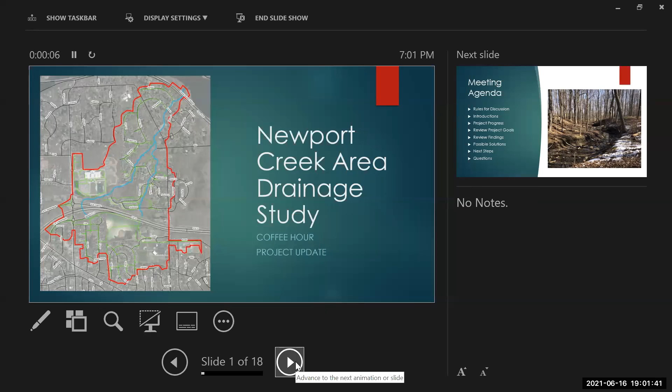I'll let Jamie start the slideshow while I say thank you to those of you who took time out of your evening to join us for a project update for our Newport Creek area drainage study.

Jamie, we're seeing your entire behind the scenes presentation. Oh, are you? Hold on a second. We are. Might want to change to the other slide or share the other screen.

But again, this is kind of the middle of the road, almost near the end of the road. What we anticipate from this meeting is kind of covering everything that we found out in the field, as well as some preliminary recommendations. But again, this is not the final report. This is not the final meeting. This is just kind of the next steps to give the community an update as to where we are on this project, and make sure that if there are any questions that we can answer along the way.

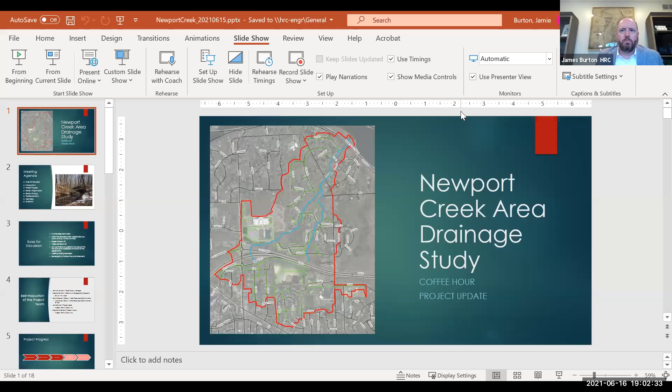And I will let Jamie try it again. Hold on. Technology always. How about that? That is perfect, Jamie. Thank you. Okay. Wonderful.

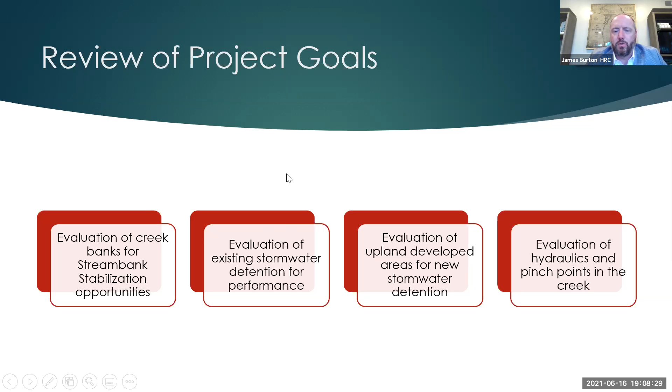Finally, in any stream that's been impacted by development, you have culvert crossings, bridge crossings, possible utilities that are in the way, creating pinch points, which really impact the hydraulics and the flow of water through the creek. So those are kind of the 4 areas of project goals we wanted to evaluate in this study. So we're going to walk through each of them independently.

What you see on this graphic is what we call a snake map or a rainbow map, color map. Green, yellow, orange, to red really highlight the areas of stream bank instability, or where there is erosion occurring. So you can see there's 2 branches, one from Skyline going to the north and to the river, and one over there, the Riverwood Timber Drive area, which converge in the middle of this district.

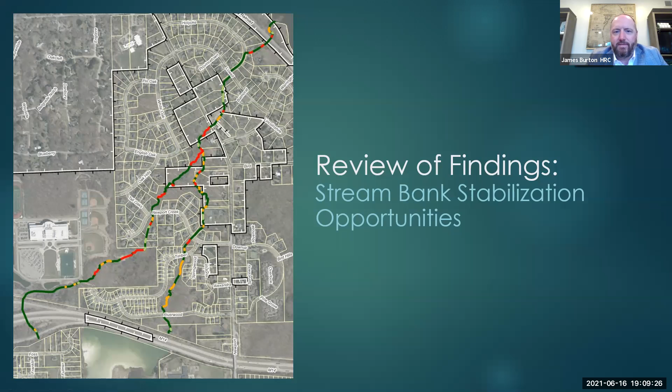So as we work our way through, we've walked both of these extensively. These are not only the data points, these represent segments that we've identified as potentially having some instability or stabilization opportunities. So we categorize those as minor, moderate, and severe.

All streams, natural stream systems, county drains, water wants to move, and water can create some erosion. Not all erosion is bad. Erosion turns into downstream deposition. The key is it is as close to being in balance as possible over different flow patterns. So some erosion is not bad, some deposition is not bad. That's just the river dealing with the natural energy.

But when you move into minor erosion, you see some of the banks here are starting to erode, undercut, some of the trees are starting to fall in. We'd call that minor erosion. This might be something that you would monitor and or you could fix with low impact solutions such as blankets, plantings, maybe a little bit of stone, but generally minor erosion is nothing to worry about other than monitor.

As you move into moderate, here's a good picture that shows both the erosion in the back, trees falling down, which may have been the cause, and also deposition occurring on the side. So the river's actually moving over into the bank; where the water is slower, it's depositing, where it's faster, it's eroding. So moderate erosion would require a little bit more intervention, whether that's using wood products, vegetated products, maybe some stone. This would be a little bit more than monitor, maybe go in there and do some grading and some other work. When you get to severe, severe can be really a couple different things.

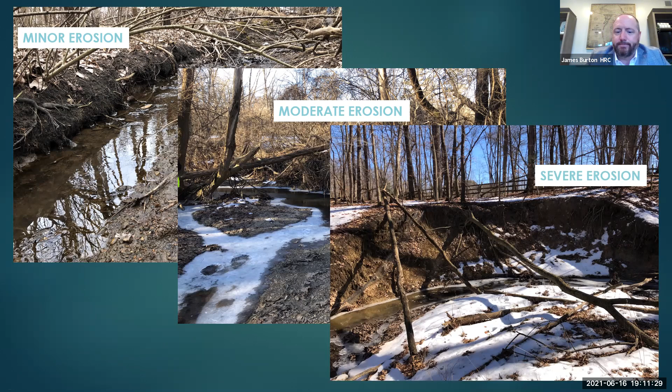Severe can be because it's a long stretch, a high stretch, so it's giving a lot of sediment to the stream. Can also be, as you notice up top here, here's a fence line. You could have utilities, sanitary, water main right behind it, which would elevate any one of these into a higher category to make sure that we're monitoring those so that they don't become a larger impact. So severe requires intervention to fix and remedy.

So what are some of the key facts of our findings? We did about 17,000 feet of stream investigation walkthrough. That's both branches. Multiply that by 2, if my math's correct, it's around 34,000 feet of banks. You're right around 20% that we've identified as minor, moderate, or severe. Severe being the highest category.

I want to mention that what we saw out there on these in particular are not uncommon for natural systems or man-made drainage systems. Rivers move, they're impacted by development, they're impacted by change in the watershed. The watershed is not the same as it was before. And so we're dealing with some of these impacts that we have on our river systems. So this isn't unique to the city or to other areas. It's not unique to these types of systems. So we expected to see some of this and we found it.

While we were out there, we looked at blockages. You can see the log jam on the upper right, sedimentation bars kind of forming in certain areas. We pointed those out. Some invasive species were identified in and around the banks, vegetative species. You got some bridge and old culvert crossings you see in the upper picture. Constructed banks. Some of the residents, in the lower picture, have gone through and have done some work, whether that was for erosion or for aesthetics, and some of it's holding up great, and some of it has been moved around and eroded as well.

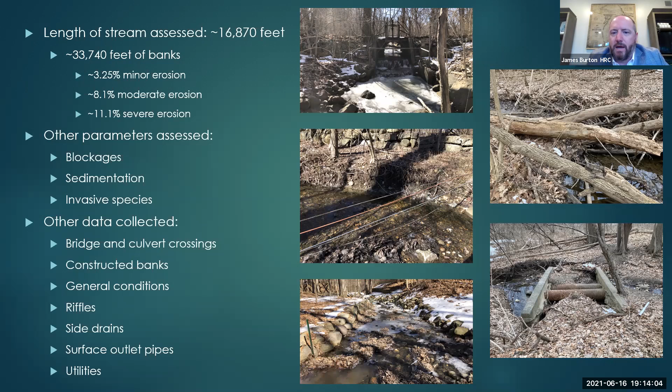We've noted general conditions, various riffles, which are natural stone structures in the creek, things coming in the side, outlet pipes and utilities. Notice in this middle picture, we believe those to be old or current phone lines, and as the river has moved, it doesn't just move laterally, it can move vertically, and utilities that weren't put in deep enough or low enough, or as the river moved, maybe that's in the bank. Sometimes you see some of these utilities being exposed out there.

So there are 17 private detention basins in this watershed, and they're kind of alphanumerically identified here. We've reviewed all of these, kind of see where they go. To note, the Skyline detention basins are private, even though schools sometimes are considered to be public. That is the way the city functions. These are all private systems that were installed as these various subdivisions developed, and typically are the responsibilities of the subdivisions themselves or the landowner, in the case of the school.

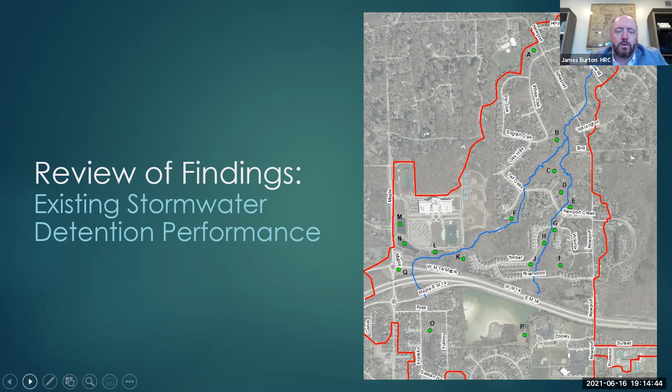Just a little bit of conversation about how storm basins work and what they are for. So storm basins are intended to pick up the increase in drainage from development, from hard surfaces, roads, houses, driveways, etc., to run it through a basic storage facility. Some have filters at the end of them that help capture some of the sediment that's picked up, but the general purpose is to hold water for a period of time, then slowly release it back into the river.

To do that, you slow the flow of water down, which means you typically then deposit whatever the water is carrying into these basins. So they fill in over time. Vegetation practices, invasives can fill these things in. But generally speaking, these are for volumetric, but they also serve a water quality standpoint.

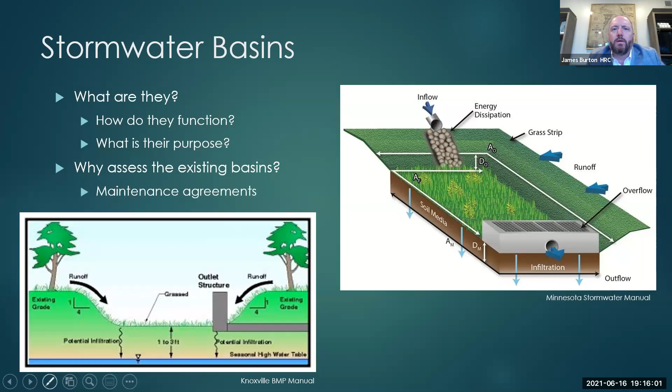There are maintenance agreements. We have not researched all of these basins yet, but most of them will likely have some sort of documentation that makes it the responsibility of the subdivision owners to maintain. And then there's some maintenance agreements or easements or things on top of that. So what did we find? We looked at 17 basins, as I mentioned. 11 of them would be recommended for ongoing maintenance or improved maintenance.

What that means is the basins were designed for a design capacity to manage the stormwater from its service area. And what's going on now is not meeting that capacity, whether that's volumetric or flow reduction. So what was constructed, what was designed, and what's there now are really just not the same; they do diminish capacity over time. We noted some invasive species and some inlet and outlet blockages.

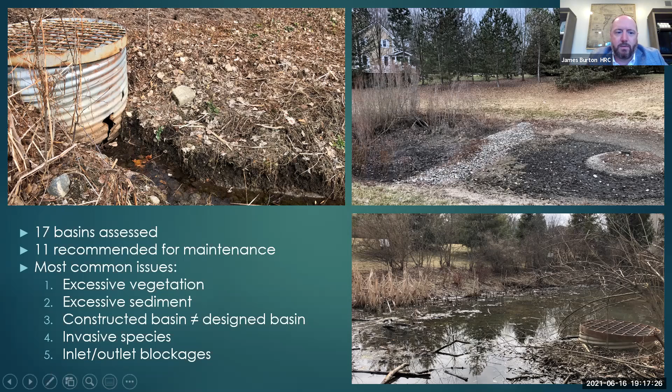Again, very common. Stormwater basins were put in by the developer and turned over to the association, whereas the roads, the sanitary, the water main are given to other entities, namely the city. Stormwater basins have just always been left out, and this is typical of all communities. Without proper maintenance, somebody taking the care to do them, they diminish over time and do not provide the same amount of capacity.

We did look at opportunities for new stormwater management areas. We've identified vacant lots. We've identified areas that might be publicly owned. I don't believe there's any other than the right of way. There's some areas associated with Skyline back in the woods, and outlots from a subdivision along the river where development did not occur are some opportunities. So there are opportunities to build new stormwater management for new volume control. It is substantially more expensive than retrofitting or performing maintenance on the private basins, but there is an ability to add additional storage within this watershed.

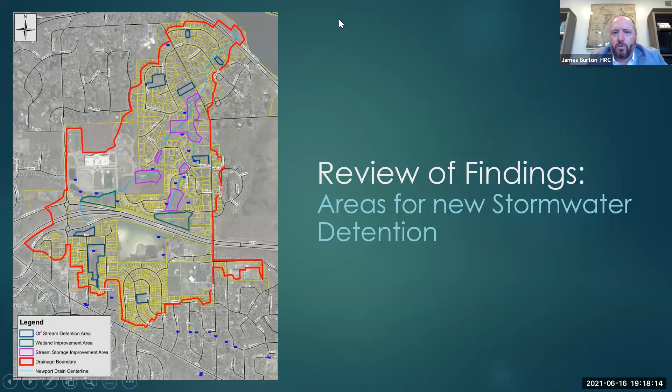Then there are culverts and road crossings at the downstream ends, railroad tracks, and culverts that were built. Culverts were designed for the best information at the time. The watershed has grown up over time as development has occurred, hydrology has changed, and our climate has changed to the point where the flows through here are not the same. So some of these culverts, which were perfectly designed 10, 20, 30 years ago, might be undersized at this point. We don't typically like to do 2 culverts anymore, because one of them catches debris. So we try to do bigger and wider culverts.

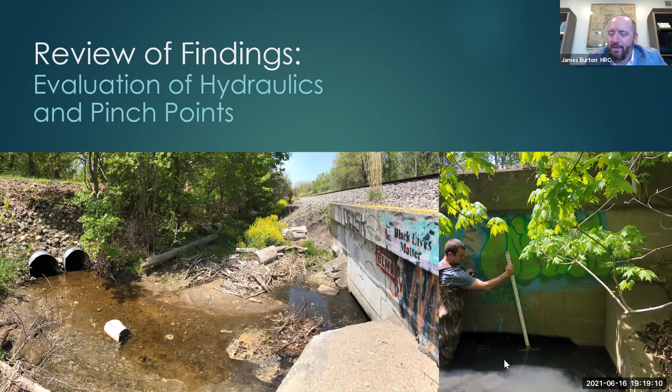You can see this bridge crossing, which is a box culvert. On the day that we were out there, these culverts were empty, but this culvert was full. So there might be an elevation issue there. We're looking into some of that at this time as well.

To add or recapture storage, the primary focus would be to take care of the existing private detention basins before adding new. The last option to add capacity is, if the drain were to be cleaned out, we would try to make a low flow channel, then an upper stage, not the floodplain for the big flood, but for those every year, every couple rain event floods, that provides additional capacity to drain. We call that a 2-stage channel. Finally, you could look at making modifications to these culverts to improve the efficiency of the flow, or you can add more flood tubes.

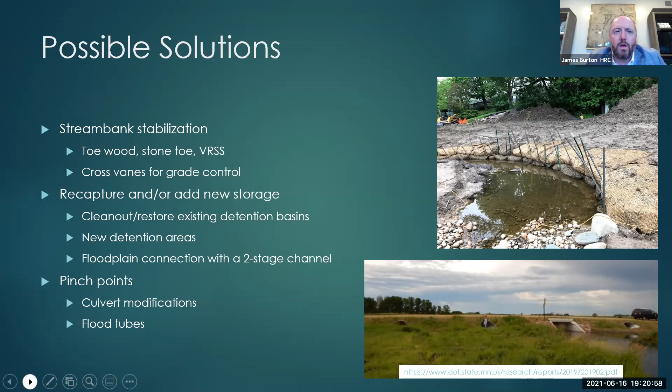So what's next? We had a coffee hour this afternoon. We've taken notes and we've got the information documented in question. We're taking into consideration anything homeowners bring up, whether that's finding a location we weren't aware of or some issue. We'll take any information out there, but also try to respond to as many questions or concerns or opportunities that exist to help the residents out.

Once this is done, as mentioned, this is not a unique project in the city, but if this were to move forward in a petition sent to the Water Resources Commissioner under the drain code for a project, it would have to be further developed out of this report and added to the city's CIP program, and then really gauged based on budgets, funding, prioritization, importance, impact, and eventually it would work its way into funding.

That's not a tomorrow decision. That is a process that the city goes through every year. And so depending on the priorities and the budget allocations, this project can then move forward as it moves up the ranks. So I'm going to pause and ask Heather and Jen, and if Harry has joined us, if you guys have got anything else to add, and then I will stop screen sharing and we can answer any questions.